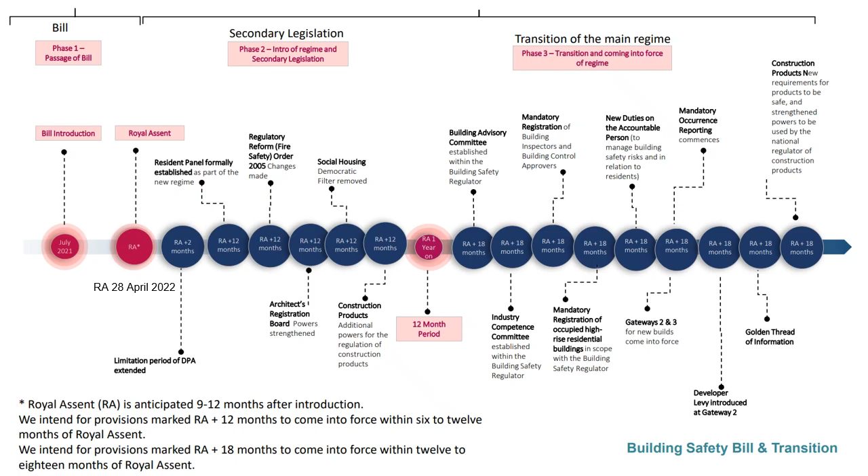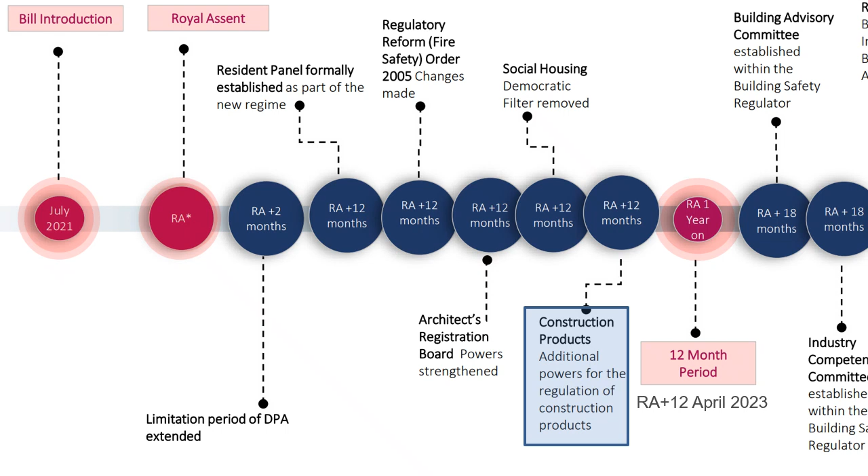The roadmap for introduction is given here with secondary legislation in a 12-month period. During secondary legislation, we will see new powers introduced overseeing architects and for construction products. Specifically for construction products we will see the Secretary of State as a new enforcement authority.

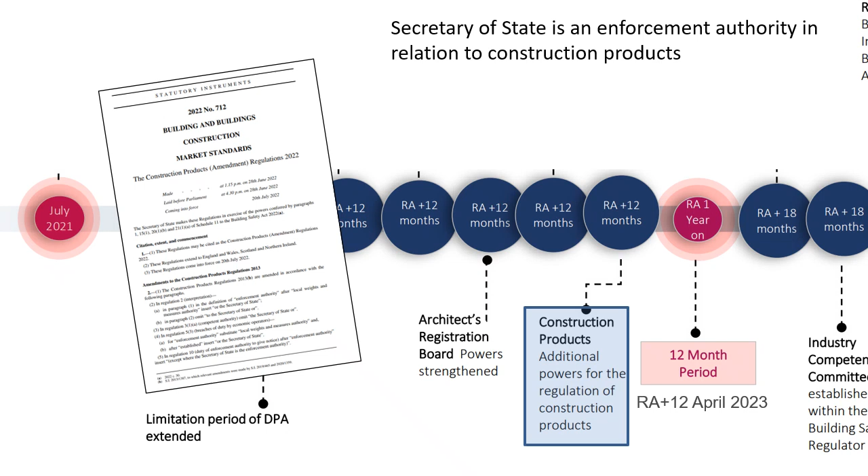The government has appointed a new building safety regulator, formed within the HSE, the Health and Safety Executive. The remit of the HSE has traditionally been responsible for health and safety at work, looking after the safety of employees. The new HSE Building Safety Regulator will oversee building regulations, effectively looking after the health and safety, not of employees, but of residents in buildings.

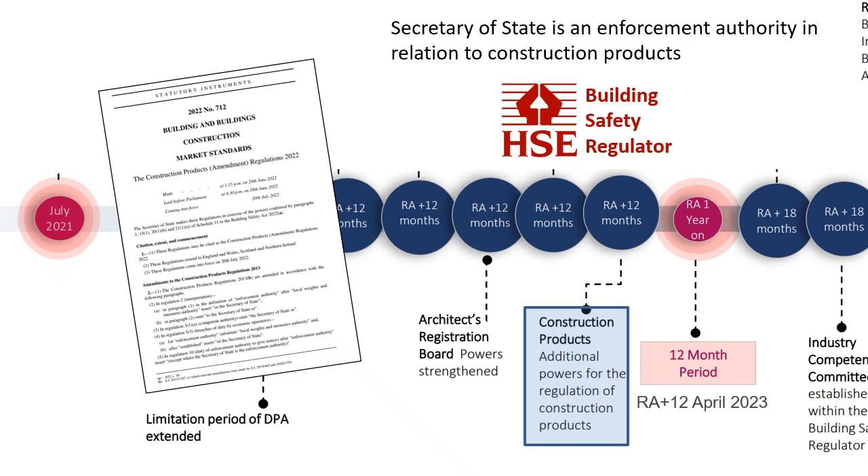The Building Safety Regulator will not replace current building inspectors and building control. Existing building inspectors and building control will still oversee building regulation compliance. But there will be a new mandatory registration for approvers of building regulations.

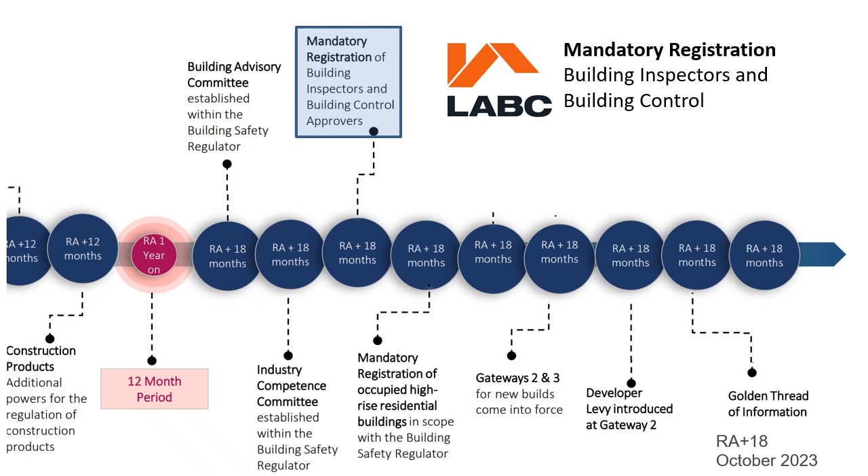The Act will introduce 3 gateways. These will be required to be met at the various stages of construction. The first gateway will need to be satisfied prior to planning. Before construction starts the second gateway will need to be completed. And the last gateway, completed before the building can be occupied.

At the second gateway, prior to construction, the Act will introduce a developer tax. This new tax on developers in the residential property market is expected to raise at least £2 billion over a decade. This will be set towards the costs of making buildings safer.

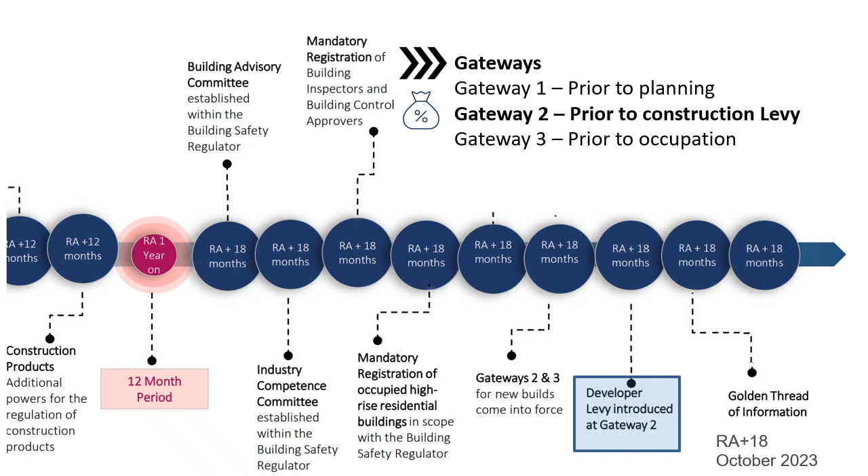In Dame Judith Hackitt's report it introduces the concept of a golden thread of information. The thread contains all the information needed to demonstrate that a building is compliant to building regulations, and this information underpins the Building Safety Act.

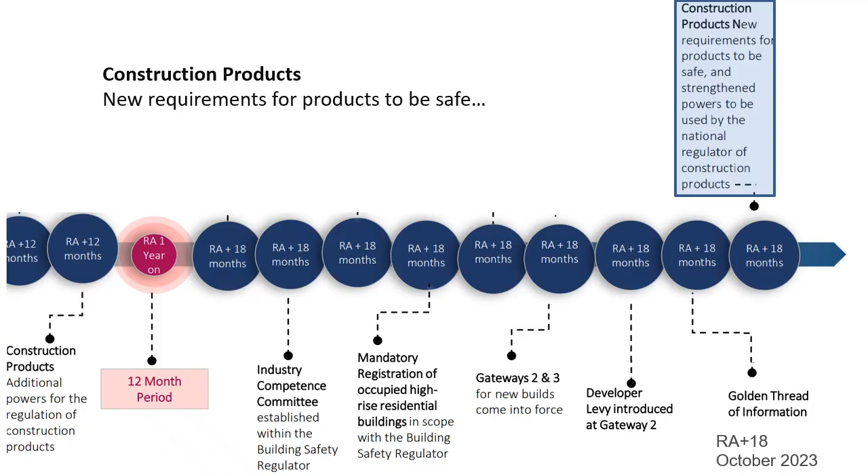The goal of the Building Safety Act is to strengthen powers to ensure construction products and buildings are built safe. The golden thread will be used to demonstrate compliance throughout the design, construction, and refurbishment of buildings. Initially, the focus will be to ensure the health and safety of buildings, including approved Document A relating to structural performance and Part B for the building's fire performance. But it is expected that these extra powers and scrutiny will extend to all parts of building regulations compliance.

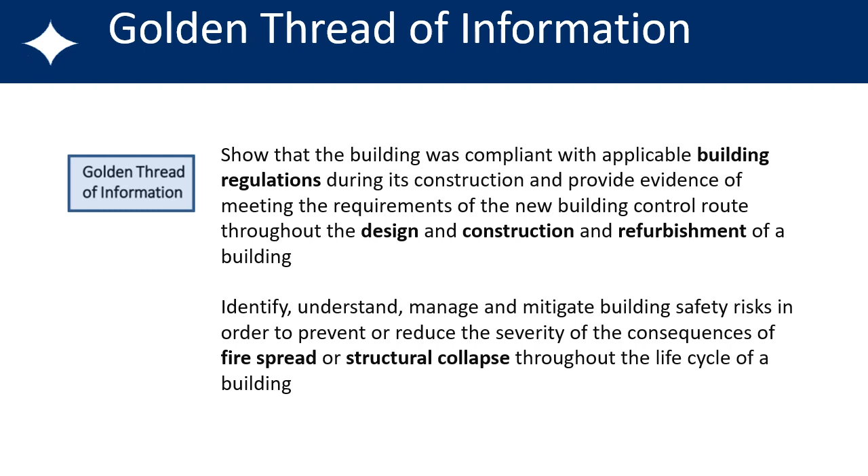The golden thread for the building will be a digital folder which is kept secure. This will need to be made available to persons which may require this information. This will form a single source of truth for demonstrating regulatory compliance.

So to summarize, the Building Safety Act will create a framework for high-quality homes for the future. There will be a new developer tax for future remediation works. The Act will have new rights for redress, ensuring that those responsible for defects are in line for costs.

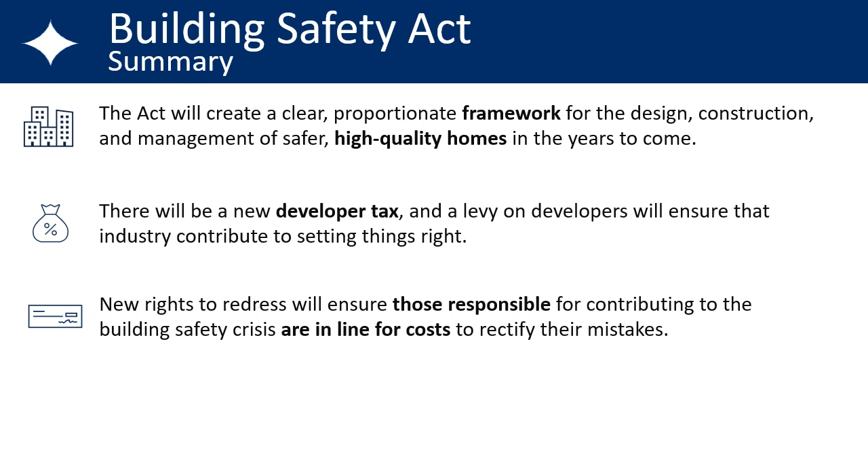The government has created a new building safety regulator within the HSE to oversee the safety of buildings. There will be a new registration for building inspectors. They will oversee the 3 gateways for different stages of construction. Each building will have a golden thread of information to demonstrate compliance.

To comply with building regulations, it is first important that we understand the various requirements of the different building regulations, and that we also keep updated with changes.

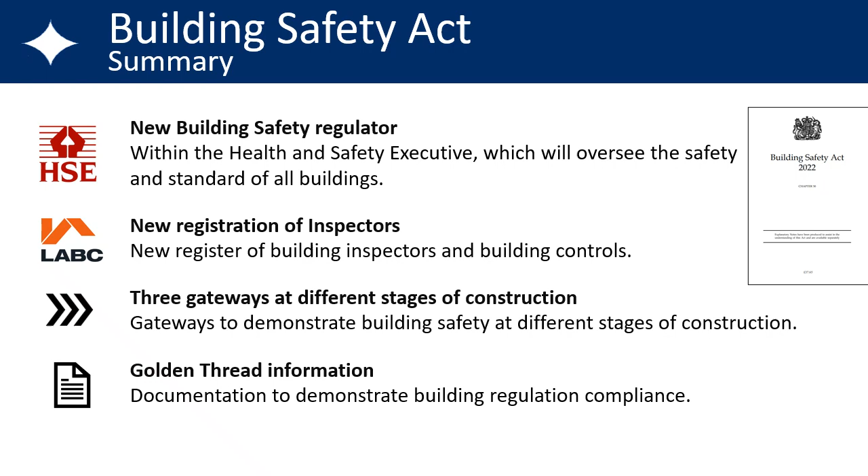Copies of all the different parts of building regulations can be freely downloaded from the .gov.uk website. On this site it is possible to register for alerts for each part of the building regulations. After registering, an email notification will be sent for any change to that part of the regulations.

Recently, building regulations have been updated with minor corrections and amendments more frequently. Whilst notifications can be set up to alert of these changes, the previous versions for minor amendments do not remain accessible on the .gov.uk website. Therefore, downloading and saving a local copy is imperative for all changes, including minor amendments.

Looking on the timeline, we had the FLO update on the 15th of June. For further details of the 2022 FLO update, you can download the full building regulations from the .gov.uk website. For a summarized list of the main changes, SMART published a technical update which can be found on SMART's website. You can also view a video of the seminar which was held in 2022, from SMART's website.

Following the initial publication of Document L, there have been some amendments. The main changes listed in the front of the 2023 version concern how the energy for district heat networks is calculated, where district heat networks are a form of shared heating system used to heat several properties. But there were also other changes to the way U values of windows and doors are calculated.

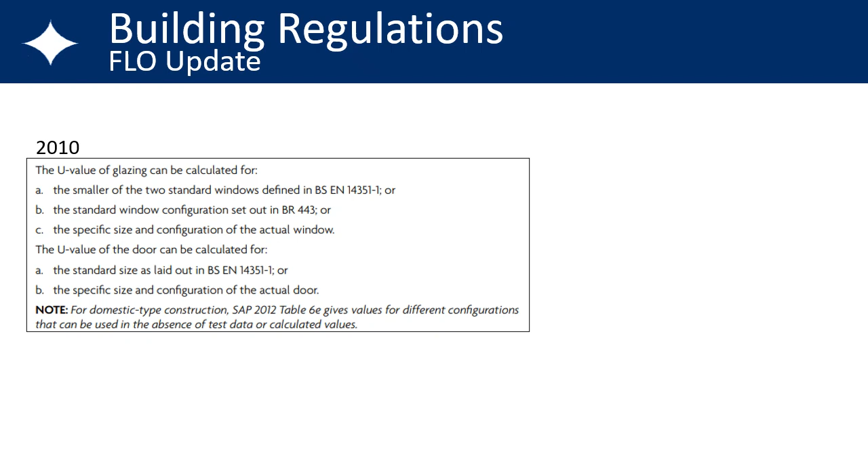In 2010 the calculation allowed for 3 configurations: EN 14351, BR 443, or the specific size and configuration. In 2022, the reference to 14351 was removed from the text, and a note was added that standard configuration should not be used for commercial windows. Therefore, commercial windows and doors should be based on the actual size and configuration.

Both actual and standard configurations have been retained for domestic properties. Hotbox physical testing to ISO 12567 will be based on standard designs, and these tests are permitted for both commercial and domestic.

Standard sizes and designs can be calculated using SMART's energy rating calculator. In addition, the U values for the actual sizes can also be exported from SMART's estimating software. For larger sizes, because of the increased glass area, the calculated U value will be better than a smaller size.

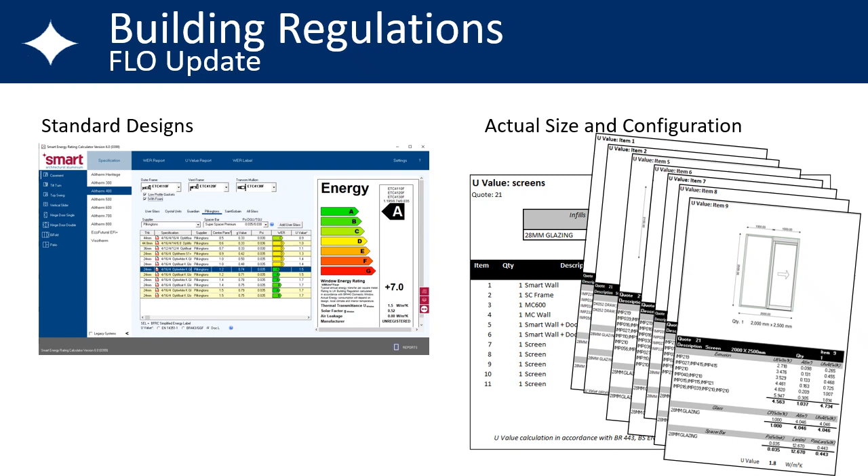As an example, a 3-pane bifold door which is 2.5 meters by 3.6 meters wide, with triple glazing, achieves a U value of 0.9. This is a larger design than the standard designs offered in building regulations, therefore this can only be used if the actual doors which are installed match this size.

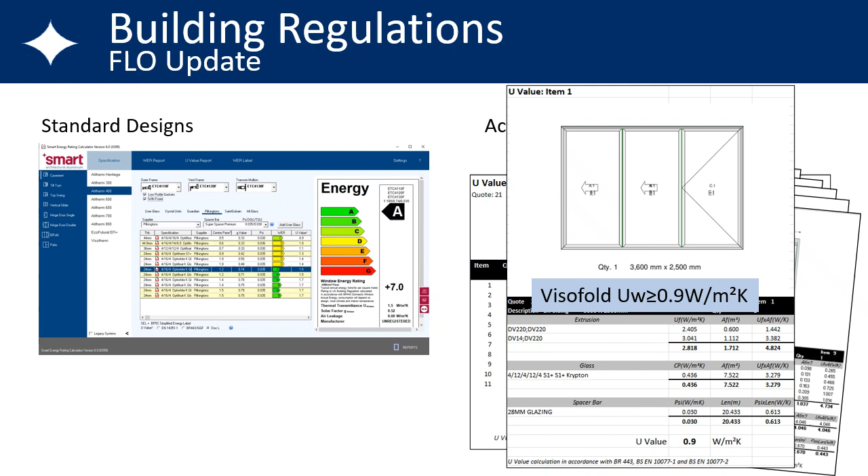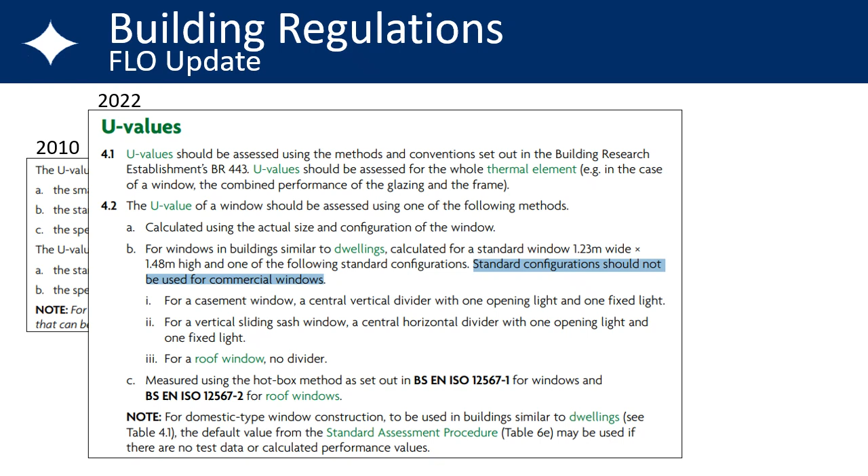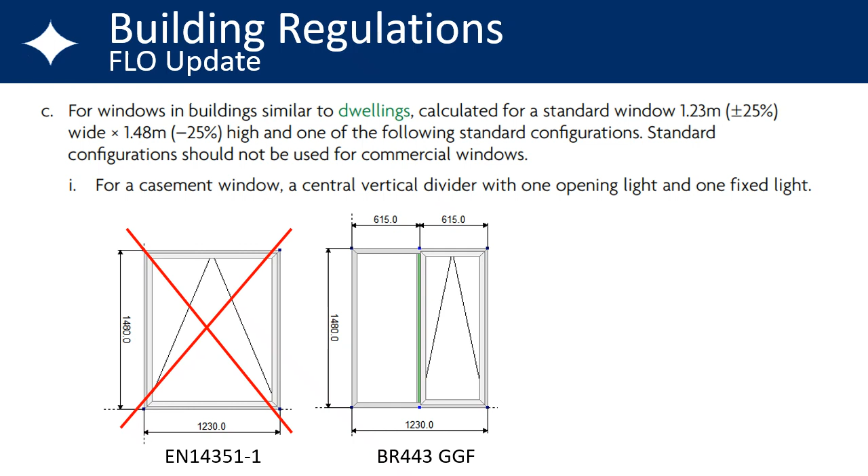In the original 2022 version, the standard size for a casement window was 1.23 meters wide by 1.48 high. However, in the 2023 update the sizes now include tolerances of 25%. For casement windows, the design is an opener next to a fixed. Before the tolerance was applied, the maximum width was 1230. With the tolerance, the permissible width increases to 1537.

In the update, the tolerances also apply to doors. Without the tolerances, the maximum standard width for a door was 2 meters. With the tolerances applied, the width increases to 2.5 meters.

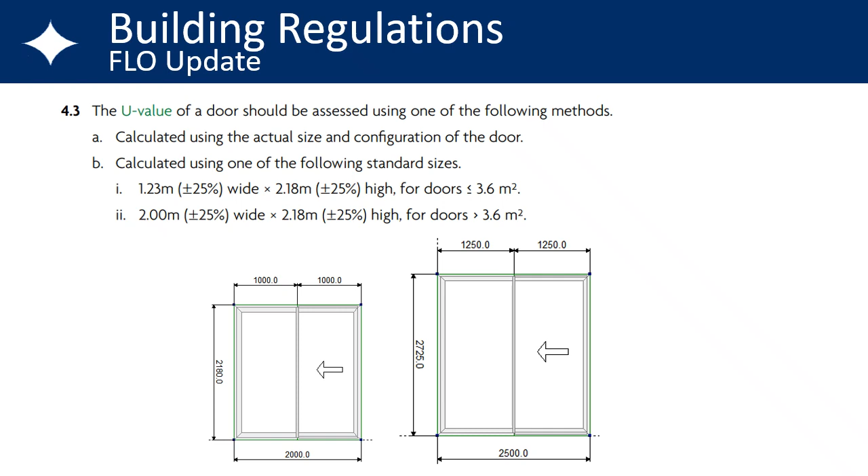The energy rating software can include the new size tolerances from Document L. As an example, the VG Plus system can achieve a door set energy rating of B, where a rating of C complies for domestic replacement. This door is based on a 2-pane door, which is only 2 meters wide.

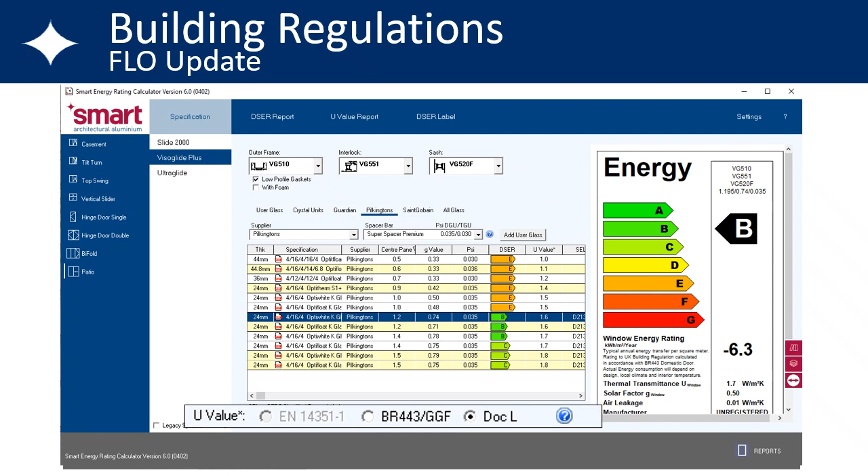Selecting the Doc L option on the screen will recalculate the U value with the tolerances applied. When calculated without the tolerances and with a center pane of 1.0, the system achieves a U value of 1.6. With the tolerances applied, the door achieves a lower U value of 1.5.

In addition to the amendment to FLO, the regulation for fire, Document B, was also amended in 2022. This amendment includes several changes to the fire safety provisions. In particular, the combustibility ban, which was introduced for tall buildings, originally only applied to 18 meters or over, now applies to buildings which are 11 meters high.

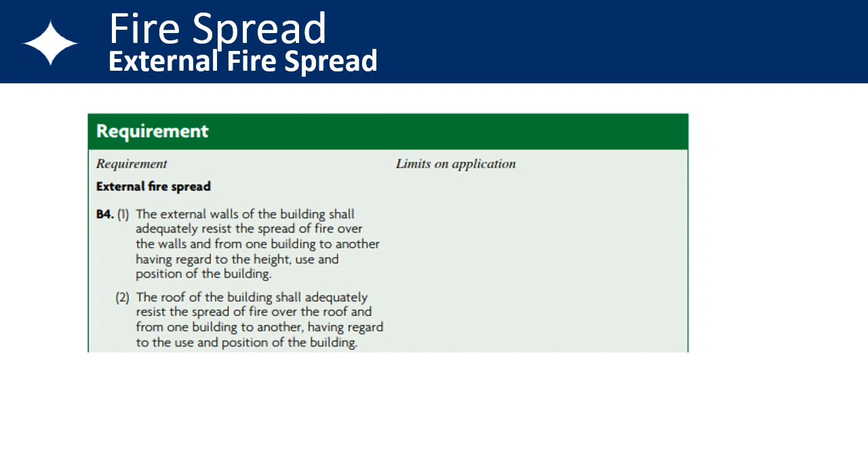The adequately resist clause, which is in regulation B4, is a requirement to adequately resist the spread of fire over walls. This part B4 remains the same as the 2006 edition.

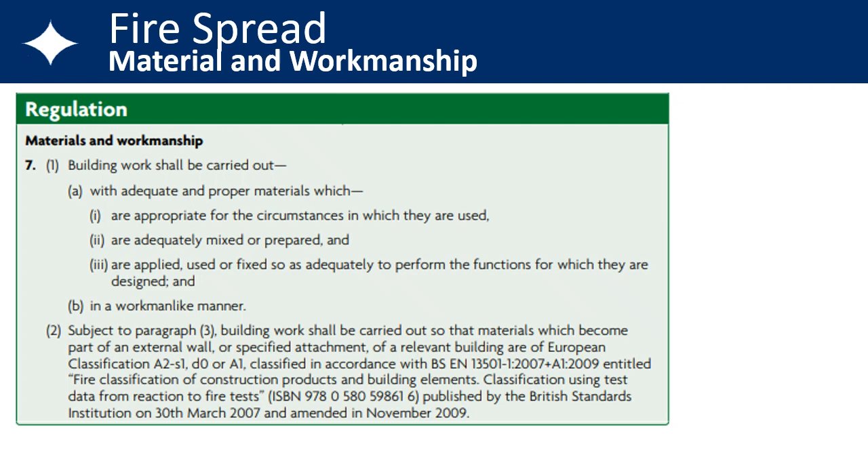2018 saw the introduction of Regulation 7 in approved Document B, where paragraph 2 of Regulation 7 explicitly bans the use of combustible materials. This requires the external wall to be tested to the European standard for combustibility EN 13501. Materials forming the wall need to be classified as non-combustible, achieving Class A1 or A2.

The ban came into force on the 21st of December 2018, with a 12-month transition period for buildings with planning prior to the ban. This requirement was further amended on the 1st of June 2022. The ban applies to relevant buildings defined in the building regulations, generally buildings with a story over 18 meters used for residential purposes.

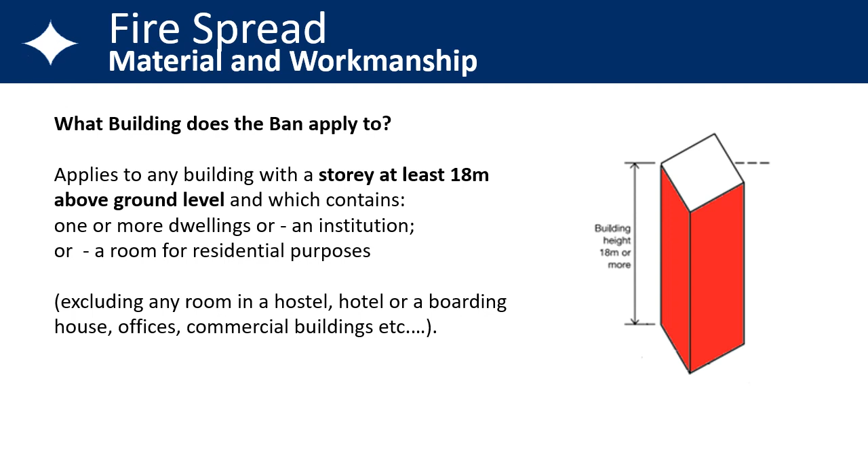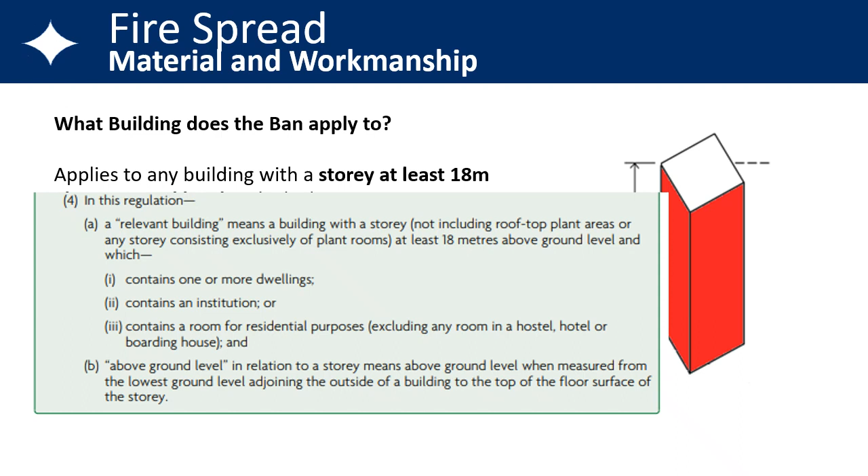This is detailed in the green text of the regulations. The change in 2022 did not change the green text, but in the accompanying guidance in the approved document, Table 10.1 now requires all residential buildings over 11 meters to have an external surface of Class A2 or better.

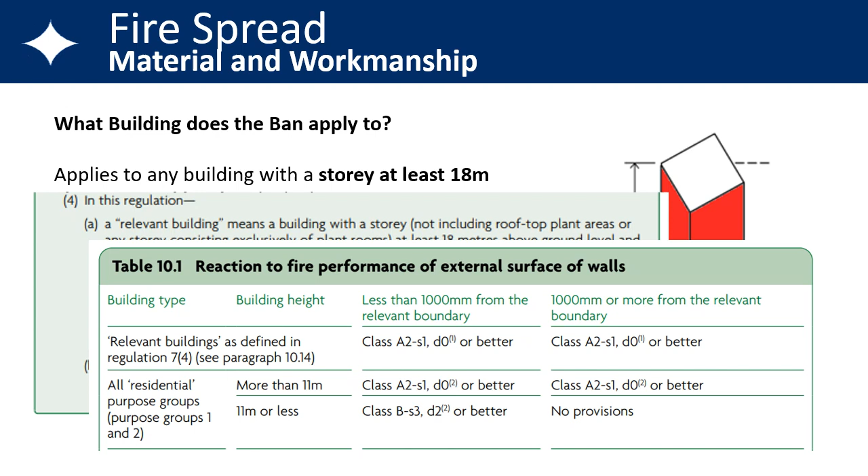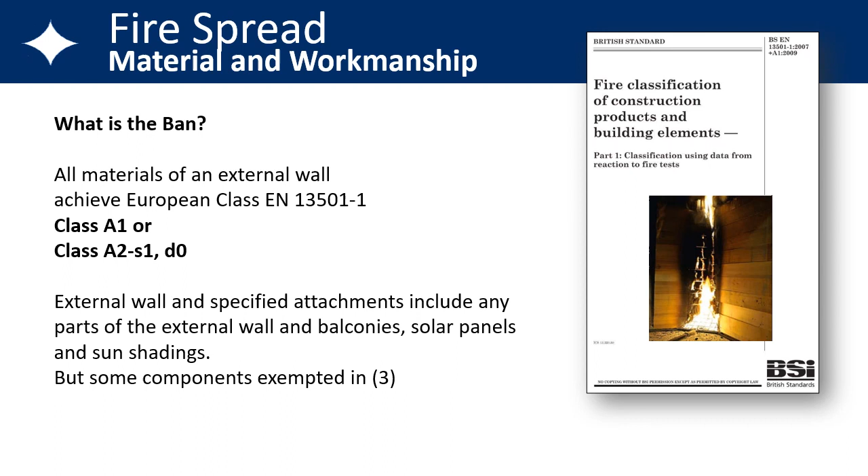Therefore, the external wall or surfaces should be to the European Class A1 or A2. Although certain parts of the wall are exempted, these items are detailed in paragraph 3. The European classifications for combustibility range from A to F, where classes A1 and A2 are considered non-combustible.

Class A1 and A2 can be achieved by metals or minerals. Aluminium and rock wool achieve A1. Polyester powder-coated aluminium can achieve a rating of A2. Polymer-based or organic materials, such as PVC and timber, are combustible. Timber achieves Class D, and PVC typically achieves Class E, which is highly combustible.

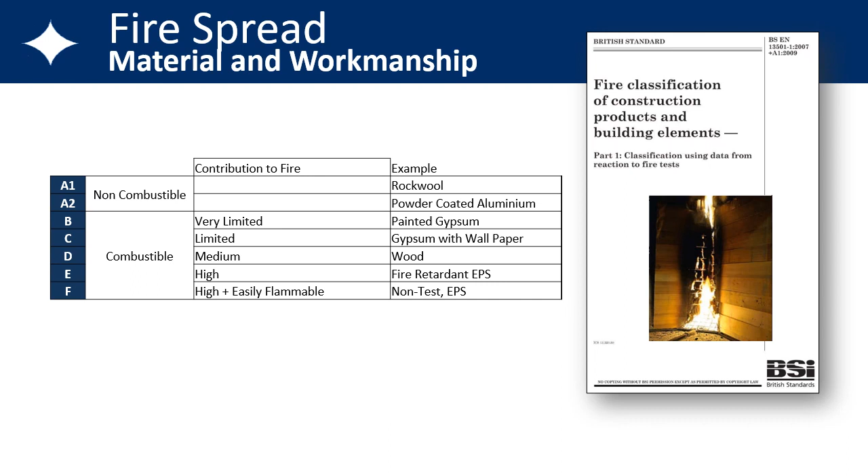Test results for powder-coated aluminium are available from Interpon. During testing, the powder-coated aluminium achieved fire behavior Class A2, smoke production S1, and flaming droplets D0.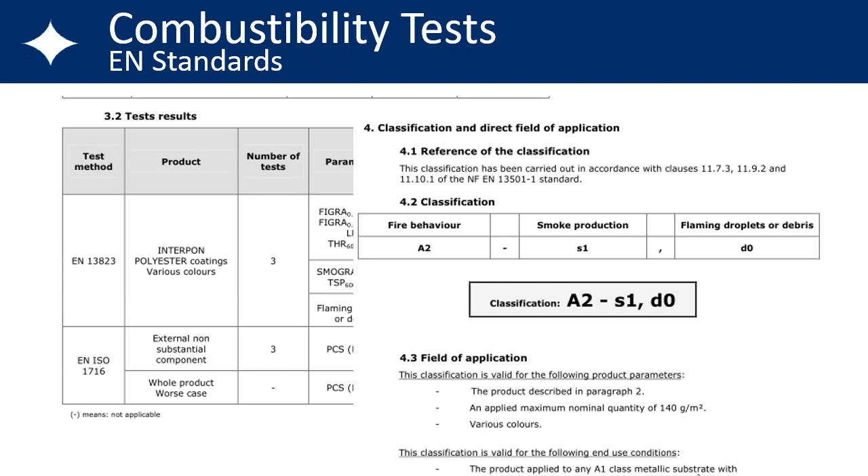Modern aluminium frames include thermal breaks to meet thermal regulations. A polyamide thermal break and PVC sections achieve Class E. Gaskets and membranes made from EPDM rubbers are also classified as combustible.

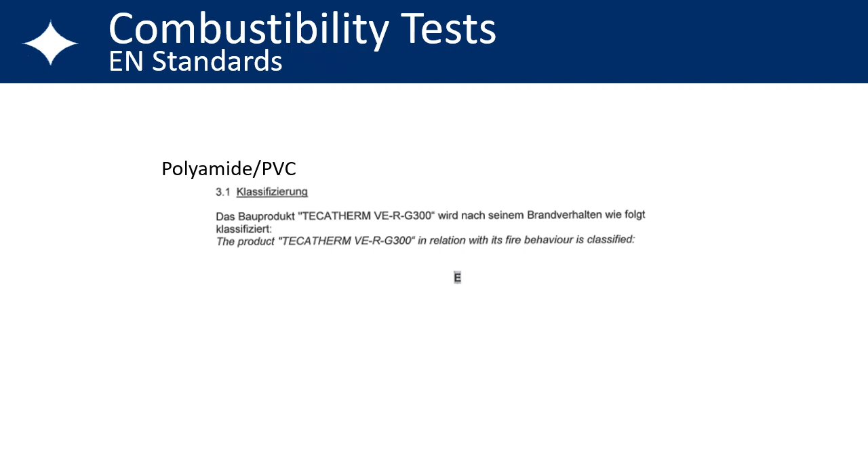You can download the reaction to fire data from the test certification part of SMART's document library on SMART's website.

As mentioned earlier, paragraph 3 exempts certain elements of the wall from the ban. In 3i, thermal breaks are exempted from the ban. In addition to thermal breaks, door frames, doors, window frames, and glass are all exempt from the ban. Further, membranes, seals and gaskets are also exempt from the ban.

Whilst membranes are exempt from the ban in the regulation, the additional text in the approved document requires that all membranes achieve Class B or better. EPDM would be considered Class E. This means that EPDM cannot be used as a membrane.

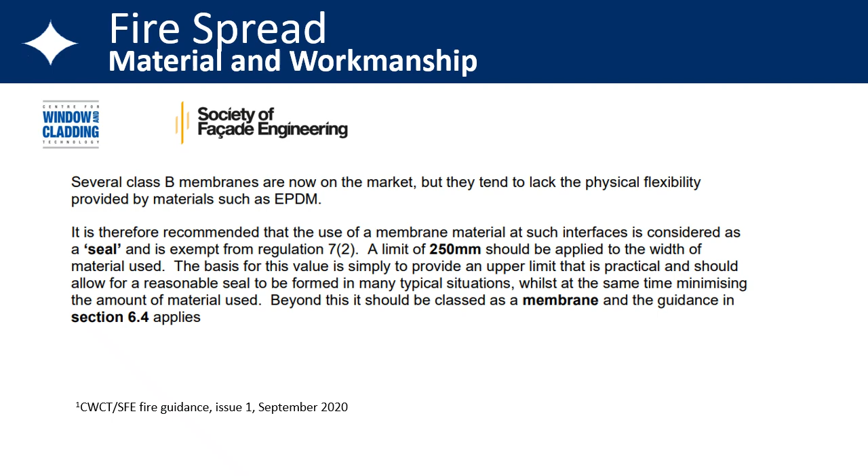There is debate around whether a perimeter seal should be considered a seal or a membrane. Both the CWCT, Center for Window and Cladding Technology, and the Society of Facade Engineering have published a joint guidance document. This distinguishes the difference between a membrane and a perimeter seal based on the width of material. If less than 250mm, then it can be classified as a seal rather than a membrane. This interpretation allows EPDM less than 250mm to be used as perimeter seals around windows.

OBEX are a manufacturer of membranes and seals. OBEX hold the view that, acting in the spirit of Regulation 7, the requirement of Class B would apply to all membranes, irrespective of their application. Therefore, a membrane that creates a seal should also achieve a minimum of Class B, S3, D0.

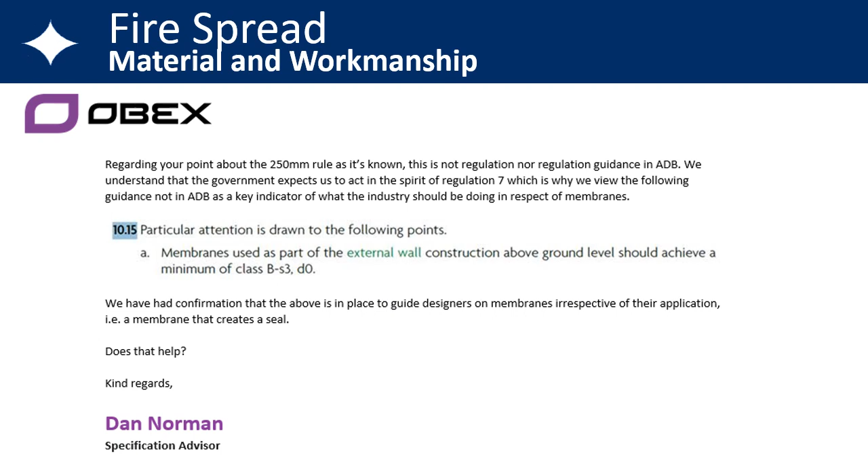The impacts of the ban effectively remove the use of organic materials from the main parts of the construction of the external wall. Using non-organic, mineral-based insulation such as rockwool is generally not as thermally efficient. This has the effect of making thermal performance harder to achieve, resulting either in an increase in wall thickness or a decrease in thermal performance.

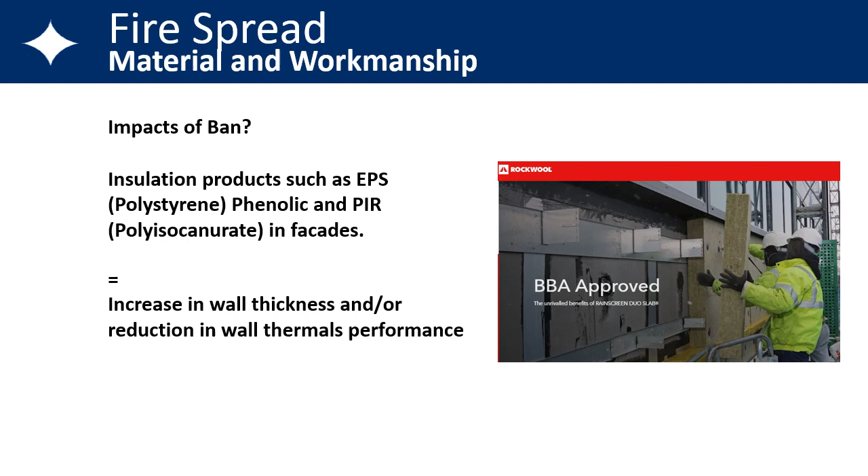Laminated glass contains an interlayer which, when tested, is classified as combustible. When glass is used in windows and doors, it is exempt from the ban, so can be laminated. But this only applies to vision glass; spandrel panel and non-vision glass need to be non-combustible.

In addition, any glass used in the balustrades of balconies or materials used in decking of balconies also needs to be non-combustible. This precludes the use of laminated glass for spandrel panels, balcony guarding, and also the use of timber in balconies for decking.

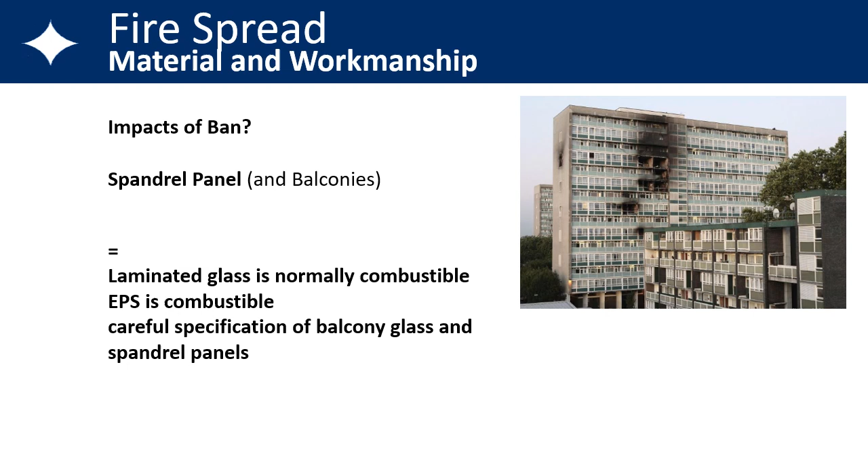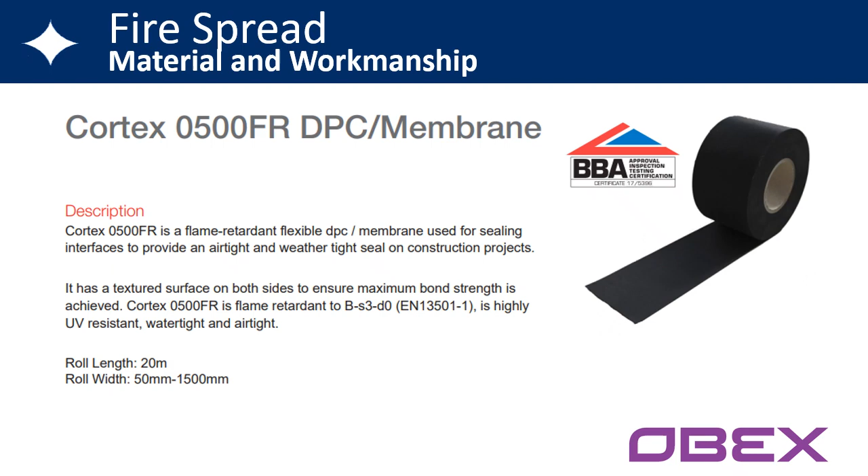As we have noted, EPDM membranes would be considered Class E and combustible. OBEX can provide a Class B membrane called Cortex 0500FR. They also supply an inorganic, interface sealing membrane which is Class A.

So to summarize, from the 1st of June, the ban applies to buildings 11 meters or over. This requires the external wall to be EN Class A1 or Class A2. But there are several exemptions, including vision glass, thermal breaks, window frames, door frames, and doors.

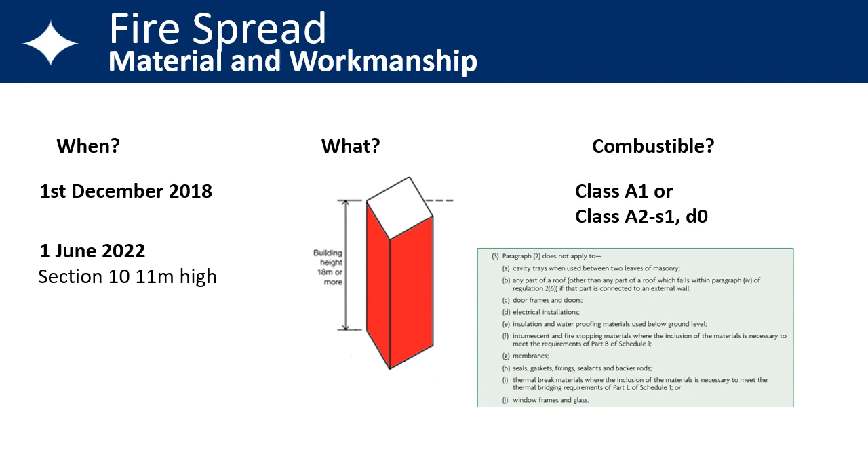There are other changes with the 2022 amendment. It is important to read and understand the full approved document. The latest version and any further updates can be downloaded from the .gov.uk website.

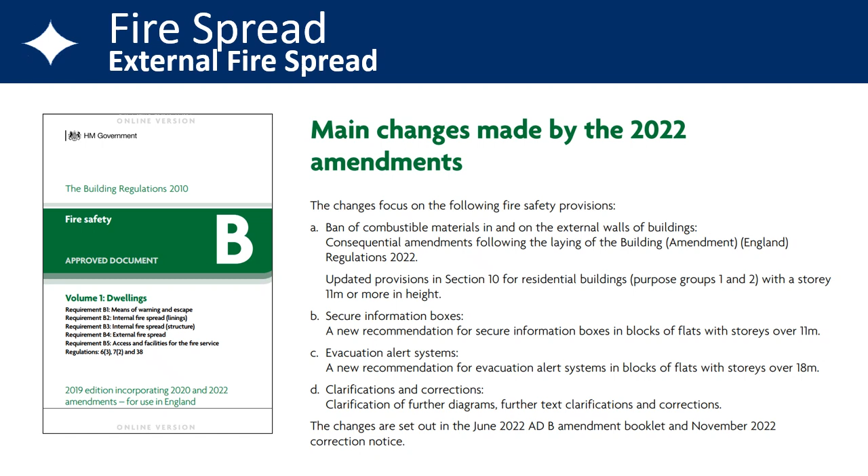In 2022 we had another change, with the publication of PAS 24. This is the publicly available standard which is referenced in approved document Q for security of windows and doors in new build domestic. The main changes in the update were a clarification of test methods, addition of new tools in Group B, and updating to references to proprietary standards.

These are the tool groups, which are used in the testing for security attacks. In PAS 24, these attacks are called manual intervention tests. The tools are based on an opportunist burglar, and include 2 credit cards, paint scrapers, and a length of mild steel wire. The original toolsets only included flat blade and cross-point screwdrivers.

In the 2022 update the screwdrivers now include a selection of both Torx and hex bits.

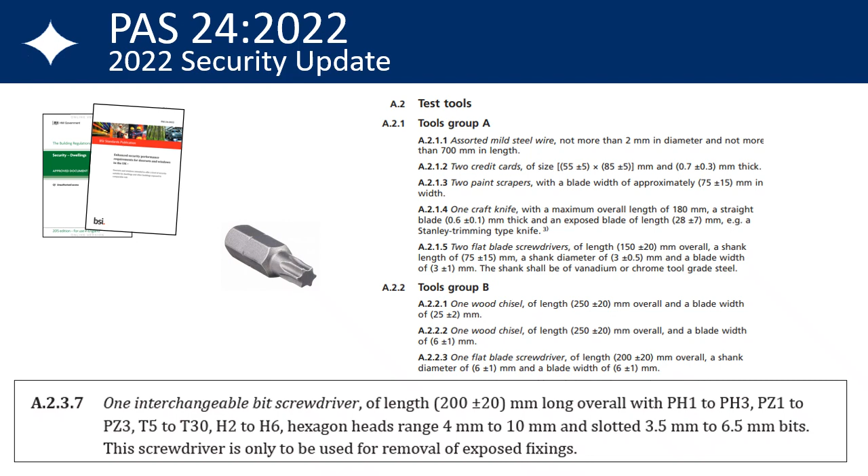As well as the new screwdrivers, there is a new integrity test on doors. This test will attempt to defeat the door lock. This attack will be easier if a Euro cylinder is designed to snap. After snapping, this leaves an aperture to attack the lock. Note 2 says the security can be enhanced if the lock and cylinder preps are created with no unnecessary voids. Therefore, for PAS 24/2022 the Euro cylinder preps should be a close fit to the cylinder and not oversized rectangles.

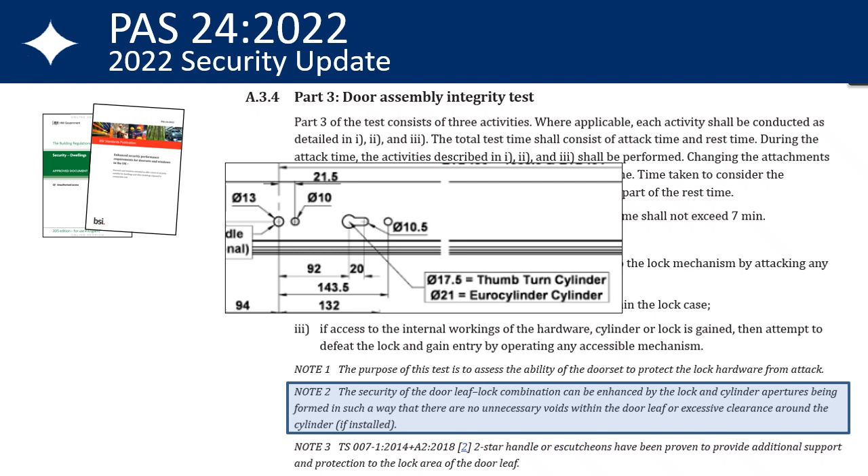Secured by Design have design guides. The new Homes Guide was updated in March 2023. This guide now references the 2022 version of PAS 24 alongside the older 2016 version. But it is noted in the guide that Secured by Design will continue to accept testing to the 2016 version until September 2024.

The approved document Q for security still references the 2012 version of PAS 24. The document has not been updated since initial release in 2015. An update to Document Q is expected later in 2024. This update would be expected to reference the 2022 version of PAS 24, with hex bits and the tighter cylinder preps currently. Document Q currently only applies to new build domestic.

There is thought that the standard could be extended to replacement and commercial markets. Also, the requirement for 6.8 security laminates or P1A is only for doors, side lights to doors. There is a possibility this could be extended to accessible windows.

To extend to domestic replacement could simply be implemented with a change to the text Q1. The text on the limits on application could be changed to relate to all dwellings rather than just new dwellings. Whilst it is expected that Doc Q will be extended to replacement domestic, it is not thought it will be extended to include all commercial properties.

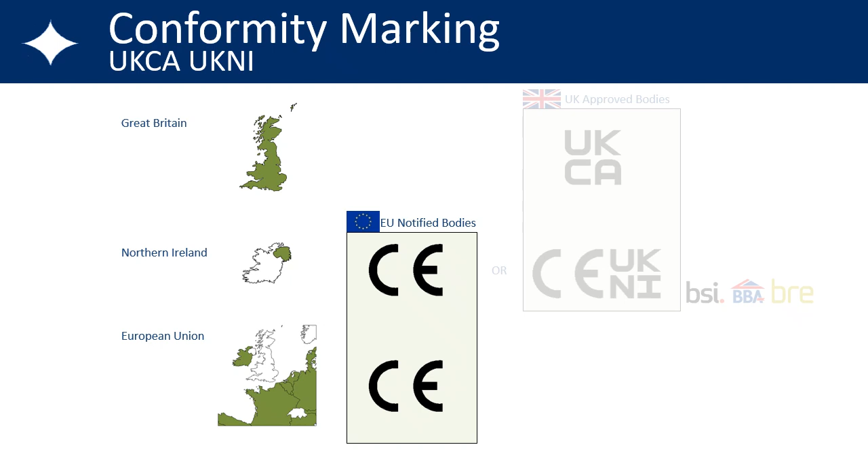So from 2025, for goods supplied for sale into Great Britain, they will require to be UKCA marked. The principles and procedures for UKCA marking are like CE marking. Both require that the manufacturer has factory production control procedures and produce declarations of performance.

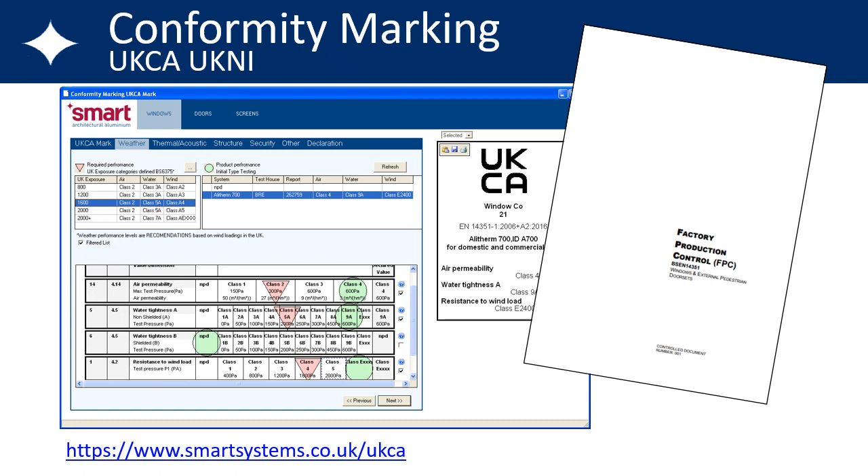The next regulation change is the Future Homes and Building Standard, which is planned for 2025. The Future Homes date originally comes from the roadmap published in the initial Future Homes consultation. This 2019 consultation related to the recent changes to Document L, when we had the interim uplifts, which are part of the Future Homes roadmap. These were originally scheduled to come into force in 2020, but came into force later in June 2022.

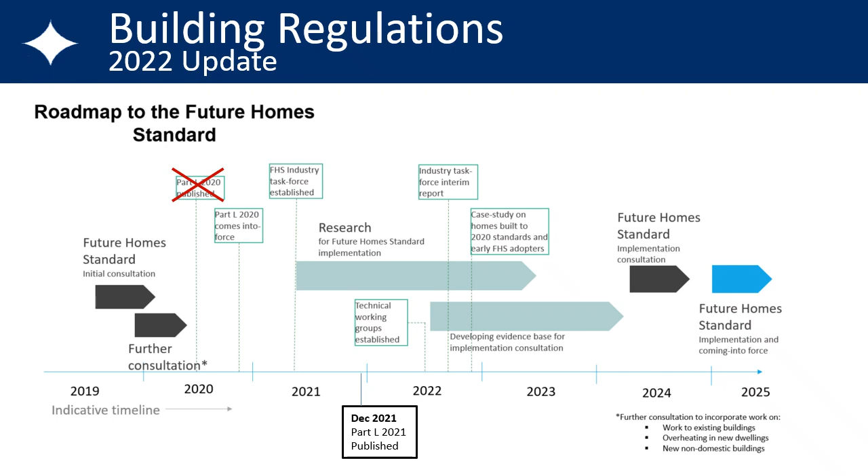In the initial consultation, it was planned that in spring of 2023 the exact technical detail and impact assessment for the Future Homes Standard should have been published. These have not been published and are delayed. There are two consultations for Doc L and the Standard Assessment Procedure, SAP, scheduled to run from February to June. The 2025 consultation is delayed. Technical details and associated impact assessment have all been delayed from the initial plan.

These delays are likely to affect the launch date for the Future Homes Standard, initially scheduled for 2025. When the consultations and impact statements are published, we should see more clarity about any revision to the plan timetable and roadmap.

In the recent Future Homes interim uplift of 22, the requirements for existing dwellings reduced the required U value to 1.4, alternatively an energy rating of Band B for windows and C for doors. What will the changes be in 2025? It has been confirmed that there will not be any change for existing dwellings, as Future Homes will only apply to new homes.

For new homes, there are two values to consider: the limiting value and the notional value. The limiting value is effectively a backstop where the windows and doors area-weighted average U value cannot exceed a U value of 1.6. The notional value is used in SAP calculation to establish the required energy efficiency of the whole building. After the building energy efficiency is calculated using notional values for the different fabric elements, the designer can offset certain elements against each other. For example, upgrading the walls or floors will allow the windows U value to be relaxed up to the limiting value.

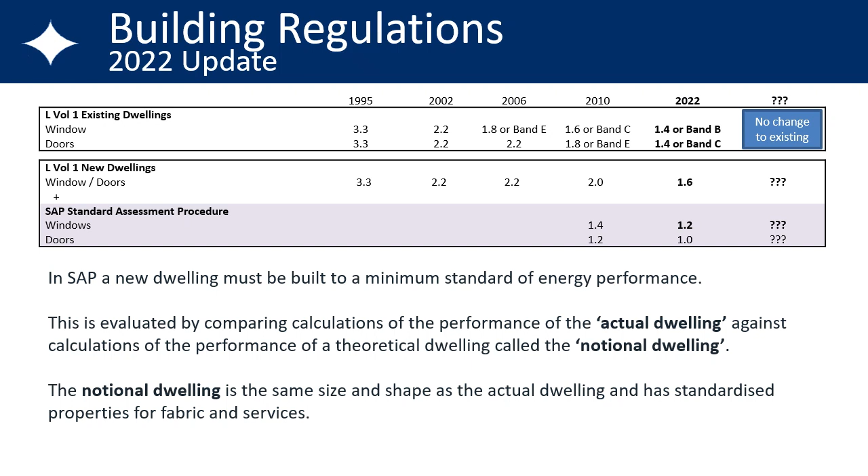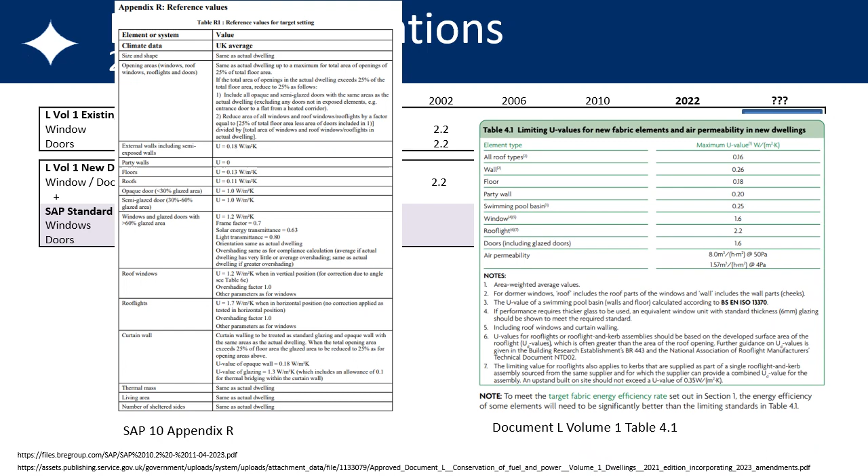The notional value comes from the Standard Assessment Procedure and the limiting value is from Table 4.1 in Document L. Looking back at the initial 2019 consultation, this proposed a limiting value of 1.6 for both windows and doors. But the notional value, which in the later consultation was referred to as FEES, Fabric Energy Efficiency Standards, did not feature in the original 2019 consultation.

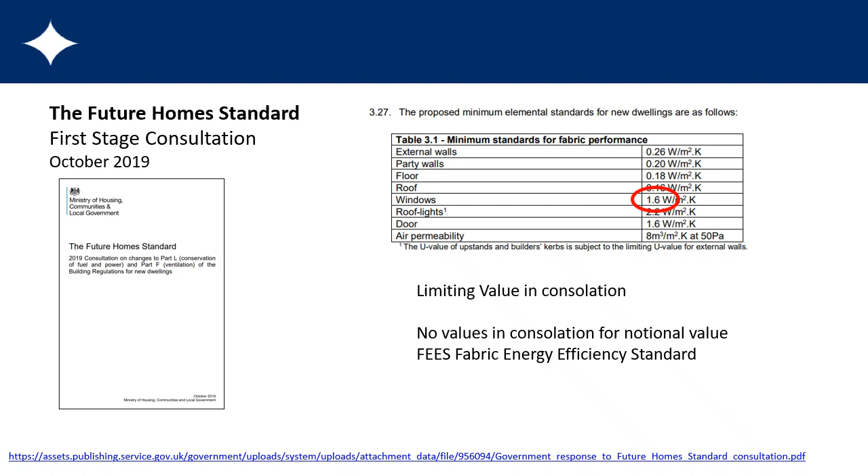The first publication for the notional value of 1.2 came in the Summary of Responses in January 2021, Table 2. Table 2 also contains a column headed Indicative Future Homes Specification, where the indicative values are proposed to be 0.8 for windows and 1.0 for doors. These values have not been consulted on and are only indicative.

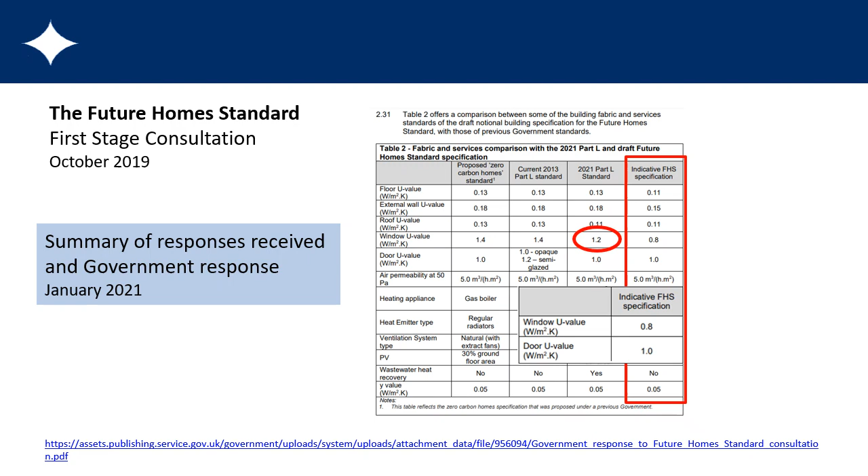So based on indicative values, the notional U value of 1.2 is expected to go to 0.8, and the notional value for doors to remain as 1.0. In this consultation there is no guidance on what the current limiting value of 1.6 will be in 2025, but it is expected to be around 1.4.

The government commissioned a report into SAP for Net Zero. This made several recommendations, including removing the concept of a notional building for compliance. Whilst we may see some significant changes to how the calculations are undertaken, it is not believed that the idea of a notional building will be removed. Currently, no alternative to notional building methods has been proposed or developed.

Based on the earlier government consultation, the notional value is expected to be 0.8 for windows and 1.0 for doors.

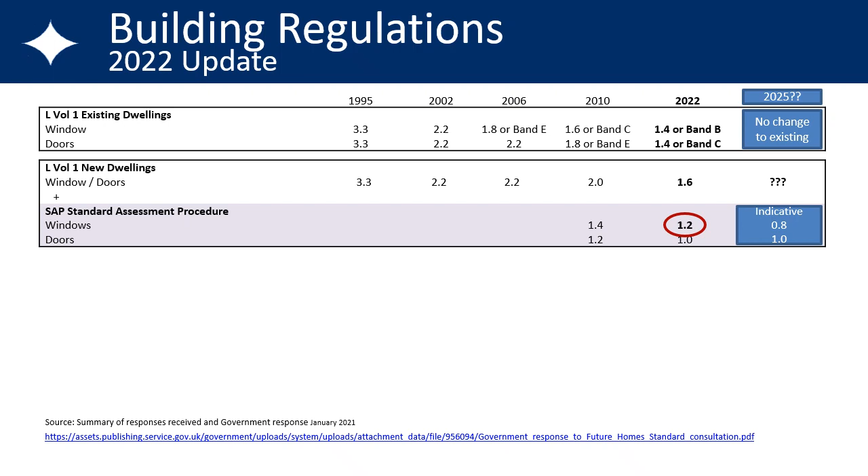In January 2021, there was a second stage consultation for the interim uplift. You will see in this consultation that the title changed. Instead of Future Homes Standard, the consultation is now titled the Future Buildings Standard.

This means that the Future Update will apply to new homes and new commercial buildings, but existing homes and commercial buildings will not see any further increases.

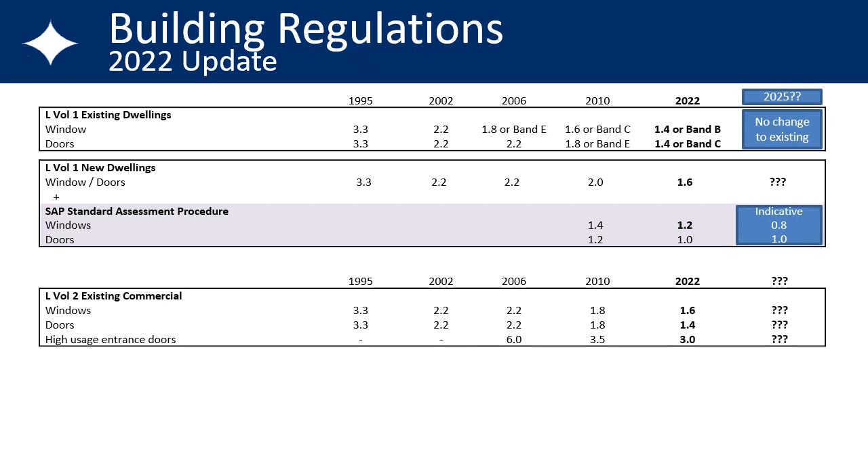New commercial will also be updated around 2025. The notional and limiting values are currently unknown, but based on previous regulations, the values for commercial are expected to have lower performance requirements than domestic.

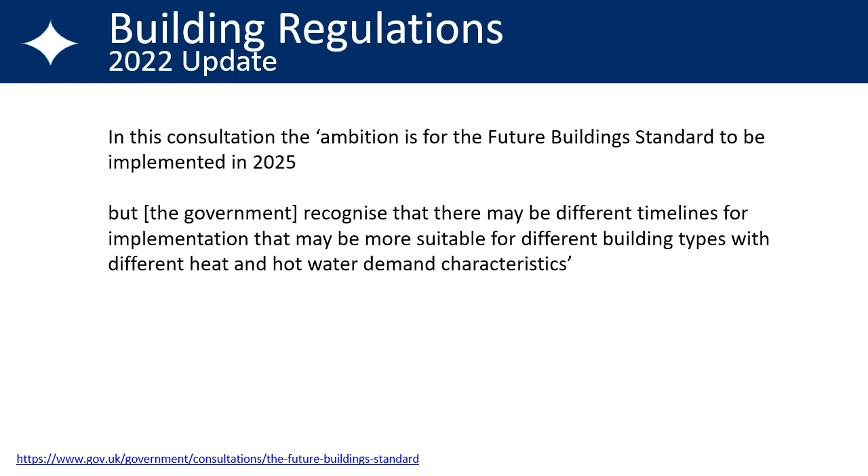Whilst the ambition was to also implement the Future Buildings Standard in 2025, there may be different timelines for implementation due to the complexities of commercial buildings. We will know more about the timelines for commercial after the next publication of the Future Buildings Standard or SBEM consultation.

If we look at the U values for domestic, we can see the overall trend for windows, with the U value reducing and improving thermal performance with each iteration of building regulations.

The indicative notional value suggests the U value of 1.2 will drop to 0.8. There is no official guidance on the limiting value, but looking at the trends this may drop to 1.4.

A window U value of 0.8 will need triple glazing. Setting the limiting value to 1.4 could allow designers scope for double glazing still to be used in new build, through value engineering and offsetting against different elements to achieve the same overall efficiency as the notional building with triple glazing.

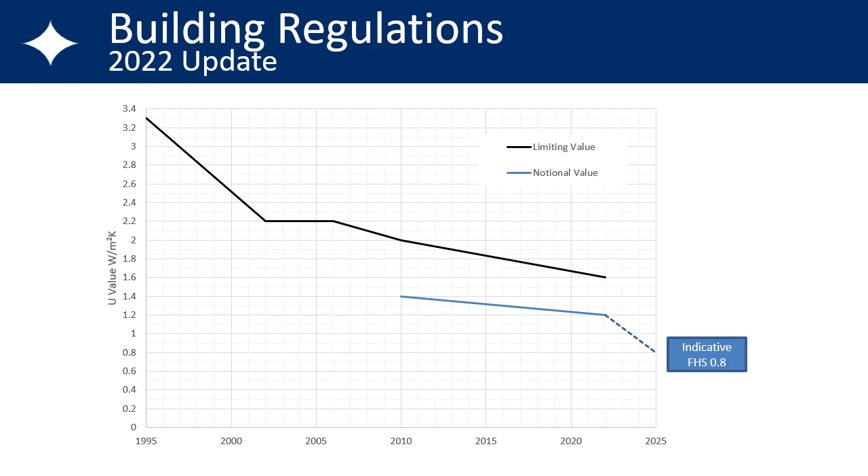Before the impact assessment and consultation for 2025 is published, we can review the details from the earlier interim uplift for indications of the likely outcome in 2025.

Question 110 asked if the proposed FEES should be higher. The question is not clear and is ambiguous as to whether this means higher fabric or higher efficiency, because a higher fabric specification and higher efficiency have totally opposite meanings. Raising the fabric U value will lower the building efficiency, and conversely lowering the fabric will raise the efficiency.

The question also combined all the fabric elements together. Responses which may have related to other elements such as walls or floor performance were combined with window fabric performance.

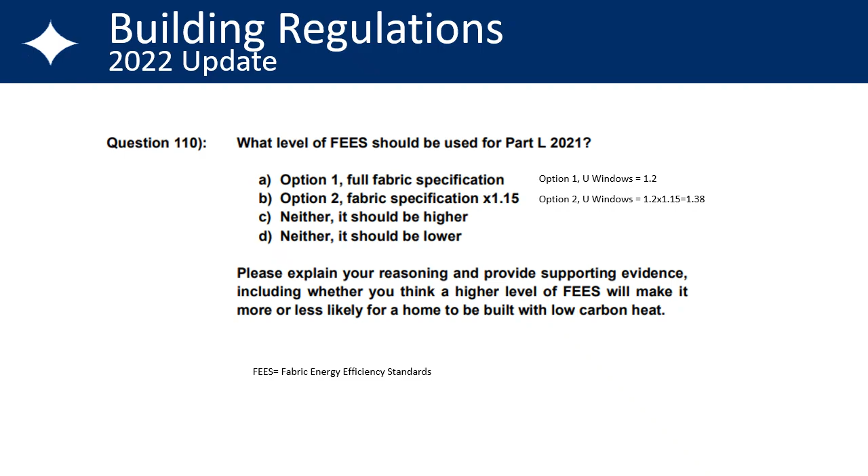It was noted that responses in the consultation raised concerns about the supply chain to achieve a 1.2 U value. The consultation feedback of 'it should be higher' has been interpreted as a desire to further improve the energy efficiency.

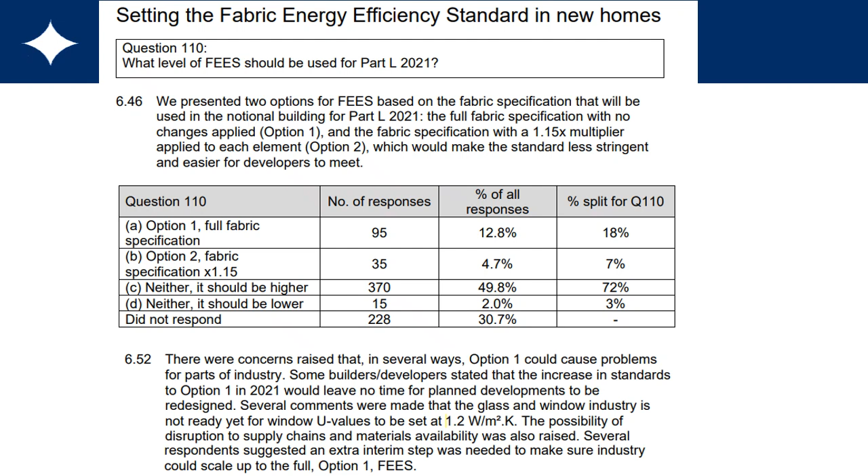For existing dwellings, new thermal elements relate to extensions, and the heading 'replacement of controlled fittings' is for replacement windows. For the interim uplift, lowering the U value to 1.4 saved £69 million of energy, however the incremental costs are calculated as £182 million. In the impact assessment, this had a net financial cost, not a financial benefit.

It is not only the potential financial benefits, but in the goal to net zero we know we must reduce our carbon emissions. The impact assessment also considered the potential carbon savings. The uplift for replacement windows saved £79 million of carbon, with a net cost of £28 million.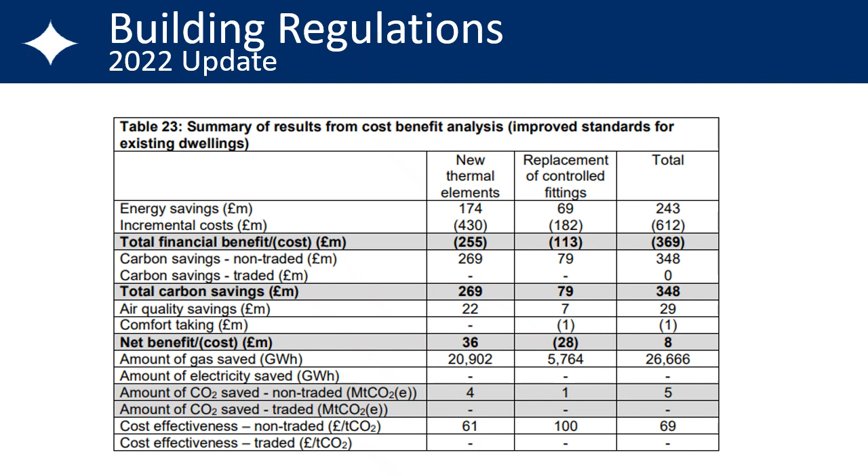In the journey to net zero, based on the government impact assessments for the uplift, whilst lowering U values did not offer financial savings, it has provided carbon savings.

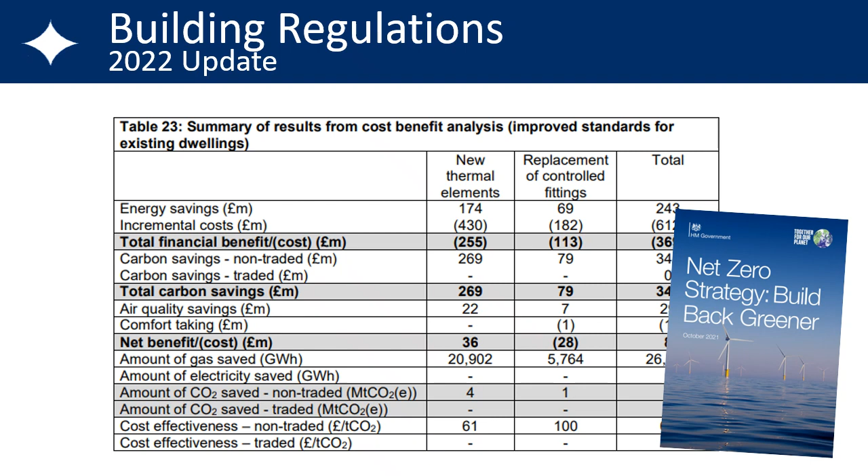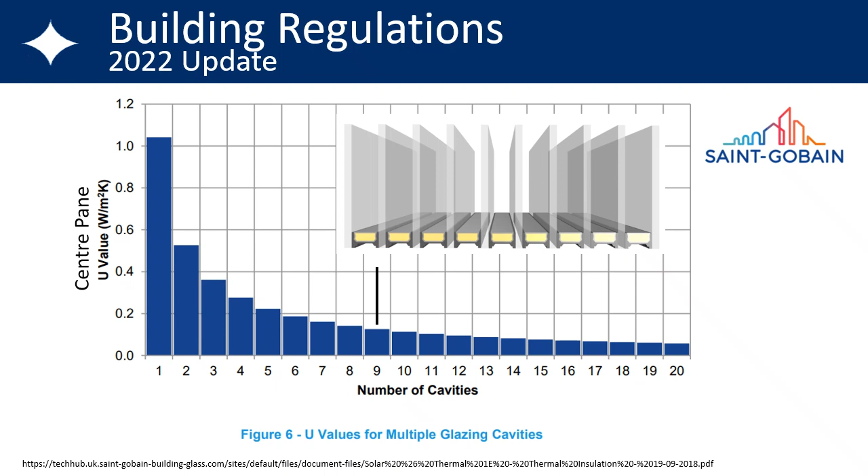Even though we are approaching zero, net zero is not zero center pane. A center pane of 0, even with 20 cavities, is not possible. For a unit made with 10 sheets of glass with 9 cavities, this would give a center pane of around 0.1. However, the unit would be over 180mm thick.

Both the financial and carbon benefits need to be carefully considered in setting the optimum fabric thermal efficiencies to help achieve net zero.

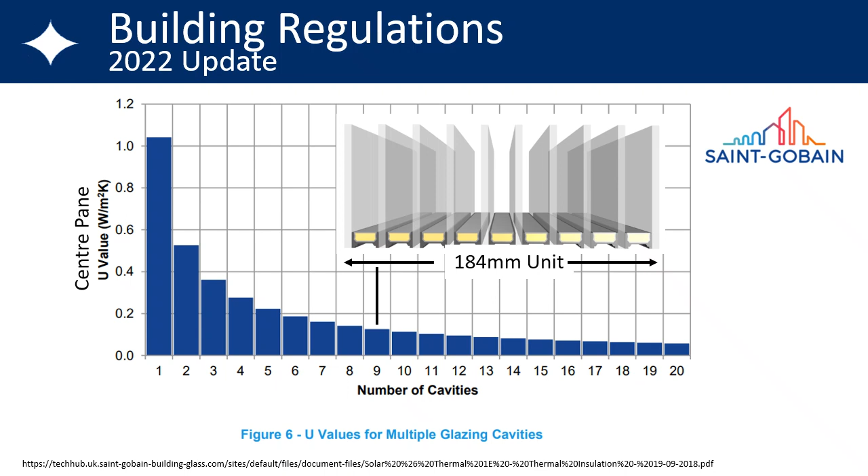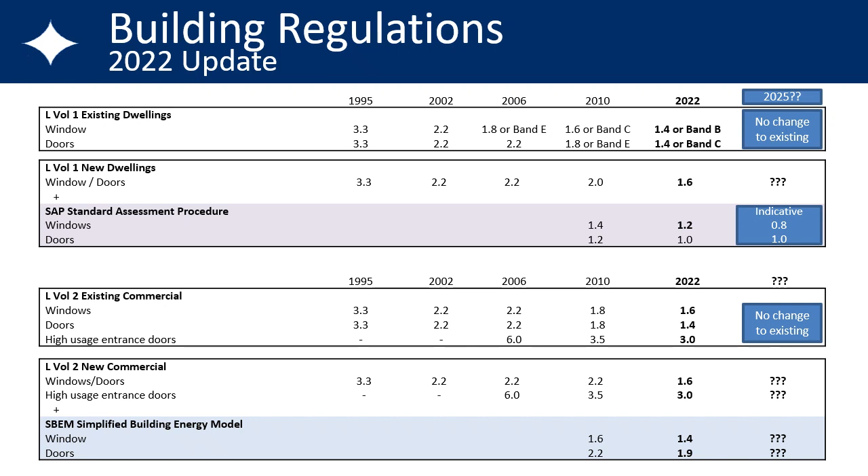To summarize, the Future Homes and Future Building Standards ambition is to be implemented by 2025. The changes will only apply to new build and there are no changes planned for replacement of existing buildings. The indicative Future Homes standard is currently 0.8 for new windows and 1.0 for new doors. The limiting value for domestic and the values for new commercial are currently not known.

This presentation has summarized both recent and anticipated changes to building regulations. To comply with building regulations, it is first important that we understand the various requirements of the different building regulations, and that we also keep updated with changes.

For full copies of all the different parts of building regulations and any future updates, these can be downloaded from the .gov.uk website.